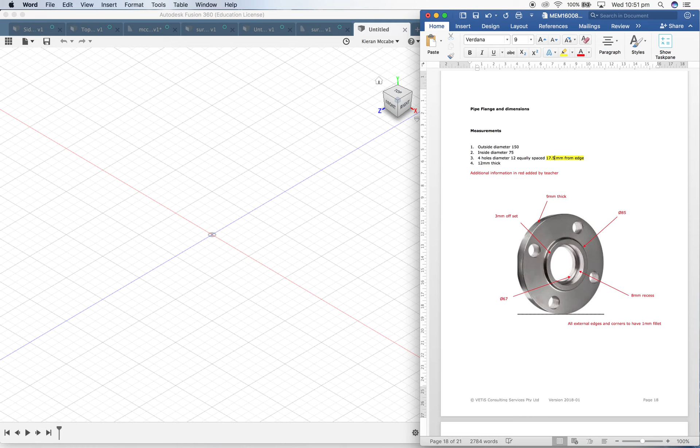And as we discussed previously, some of the information has been missed and anything in red is what we've added. Now one thing I need to add here, for point number 3, the 4 holes are diameter 12 equally spaced at 20 millimeters. That size should actually be 17.5. So remember that as we go along, please.

So to start, I'm going to show you a way to draw it. With this project, or this shape, there's a number of ways of doing it. So the way I'm going to show you is just one way of many, and it's completely up to yourself. So as always, I'm going to click the sketch, and I'm going to take the plane and start from here.

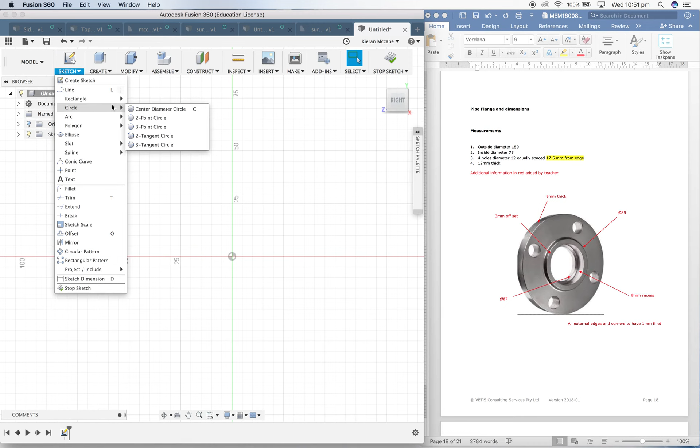Now this time we're going to start using the circle tool. There are a number to use. Best one to go with is just the first one, the centre diameter circle, and I'm going to go just in the centre here. And the first size is diameter. We're looking at 150, and just enter that.

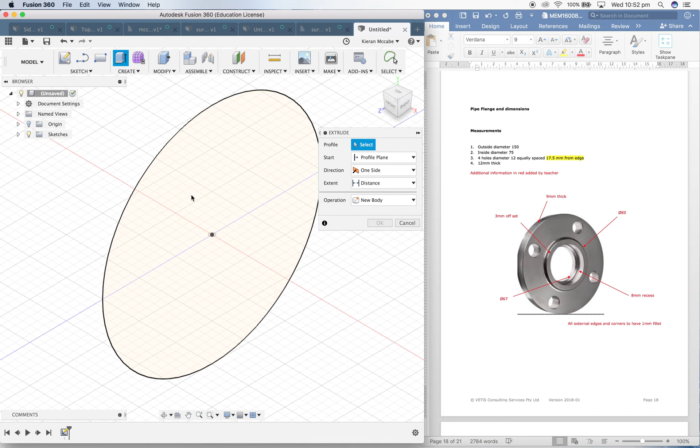Now, next thing I'm going to do is put the depth on it. As we see here, the overall thickness is 12 millimeters. So I'm going to extrude it 12 millimeters, like so. Now that I've got the main shape, I'm now going to start from the smaller sizes, the small diameters, and work my way out.

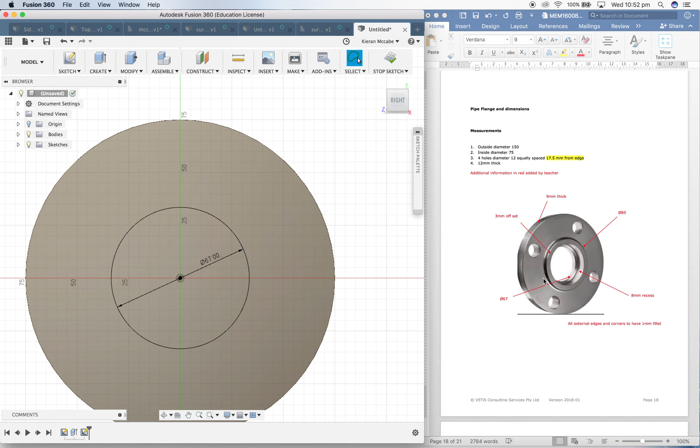Again, I'm just going to continue selecting a face as we go on. So first one, circle. Now the smallest size I've got here is a diameter of 67, and that is for that internal face. In here, and again it's got to be accurate. I'm going to stop the sketch, and with this one again, with the extrude tool, we're going to go the whole way through, like so.

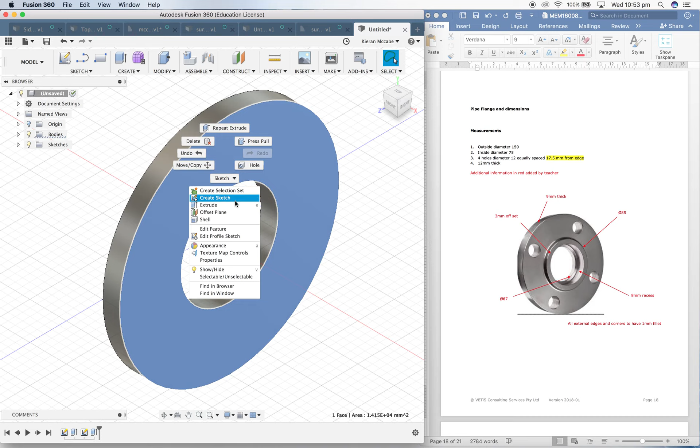So now that we've got that, we're now going to work on this lip here. And again, that diameter will be the 75, which is the internal size. So again, on here, taking the sketch, take the circle, just move that up, and here I'm going to go 75. Make sure it's definitely set, finish the drawing, and again we're going to extrude it.

Now this time, we need to look here, the recess is 8 millimeters. So again we're going in the way to cut through the material, and we want to remove 8 millimeters, like we did here. Now what we're going to look at doing is removing all of this material, and there's an easy way to do that, and I'll show you how.

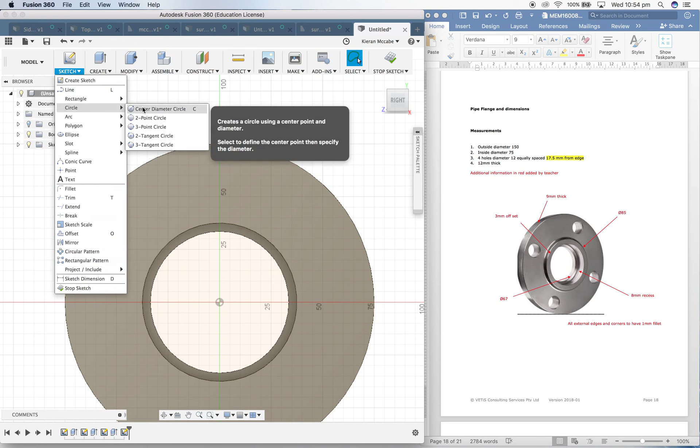So again, same face, we can select and create the sketch, and the size we're after now is 85. Now for some of you it might be worthwhile crossing these off your booklet as you go, otherwise you may get a little bit confused. So again, take the circle, go through the centre, and we're going to go for a diameter of 85.

And stop the sketch. Now this time we're focusing on the outer circle, and as we can see here, the main body is 9, and it's an offset of 3. So what we're going to do is go in reverse, and we're going to take 3 millimeters away from this section, like so, and OK it there.

Now we're going to look at putting in the holes, and this is where this part comes in. So again, going to select, create a sketch on the face, and all we're going to do to start is basic circle tool, just somewhere here. You can actually put it anywhere in the circle you want. I'm just going to start at the top here, line out with my circle, and the diameter of it was 12, like we said in point number 3, and we have that there.

Now we need to get the distance. It's saying 17.5 from the edge. Now to use our dimension tool, it will not give us a measurement from the edge of the circle to the centre. So what we're going to do is select the centre of our flange to the centre of our circle and bring it out here. We can see that the size is 60.

Now a bit of simple maths: instead of typing in 17.5, we're going to remove the 17.5 from the radius of the bigger circle, which was 75. So if we take that away, that will give us 57.5, like so.

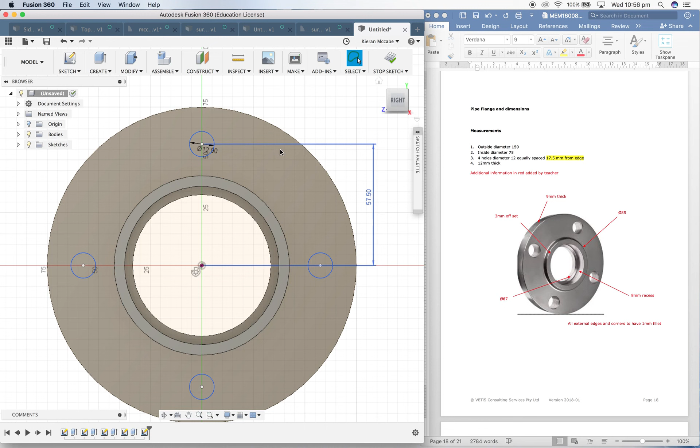Now in here, quantity, you can have as many as you want, but we only need 4, and it'll equally space them around the circle for us. I'm going to press OK, like so. When they're all in place, we're going to stop the sketch, and like again, we're going to use the extrude tool. We're going to individually select all 4, and we're going to go back the way 9 millimeters to remove the material, like so.

Now to finish the drawing, all we have to do now is round the edges, as it says down the bottom here. Now to do so, we're going to go into modify, and we're going to look at the fillet tool. And all we're going to do is focus on the outside edges. So working my way around on the top face. Again, don't need to hold anything, just click and it will select all of them. And this piece in here. Don't need to do anything in here or at the bottom, just these.

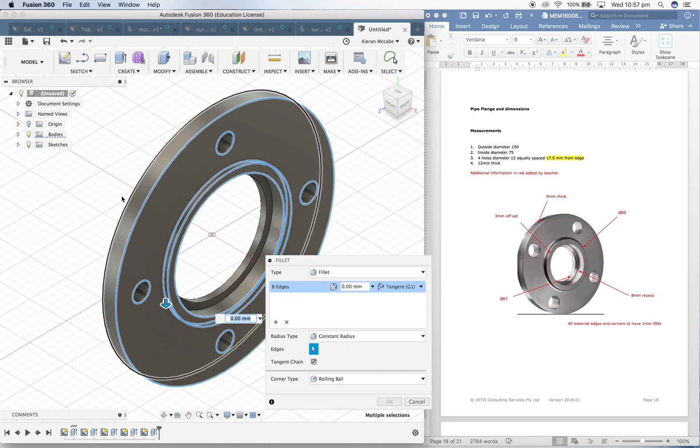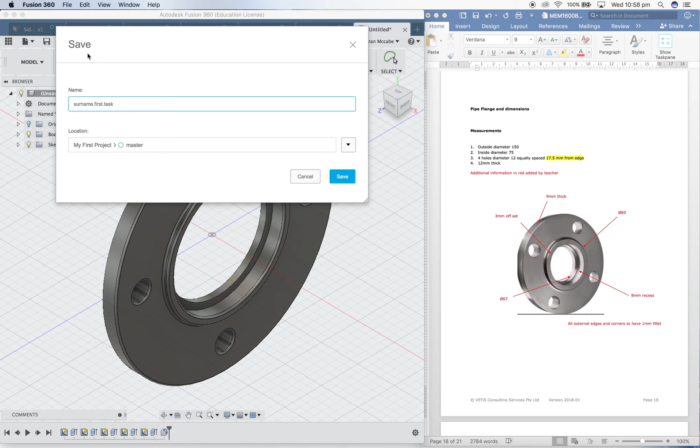And then in here, we're just going to set the radius to 1. All we want is a slight round on it and nothing else. Like so. So, when we get to this stage, that is the drawing complete for now. And all we have to do is make sure we save it. Again, it's going to be surname, first name, that'll be class 4, and it'll be the flange. And we can save that like so.

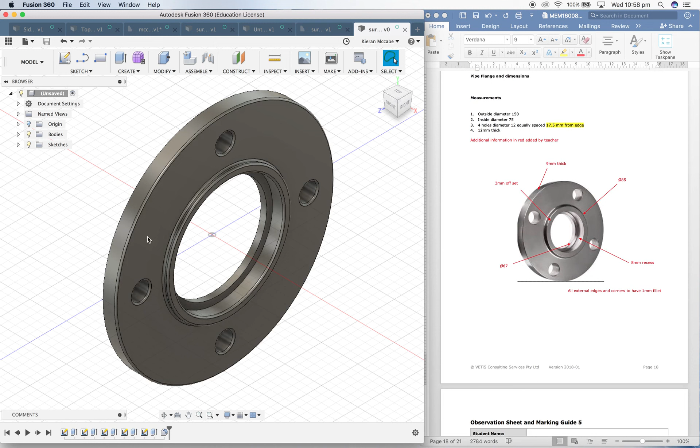Now, another part of the stipulation for this drawing, it was actually asking us to render the drawing. So what we're going to do here is we are going to add the material to it. So once this is saved, we're going to go up to where it says model, down into the drop menu, and press render. And again, straight away you can see that everything's changed. Now we can spend a load of time in here, but all we want to do is pick a physical material. Now the great thing is with Fusion, there are a number of different ones, but all I want you to do is pick a metal.

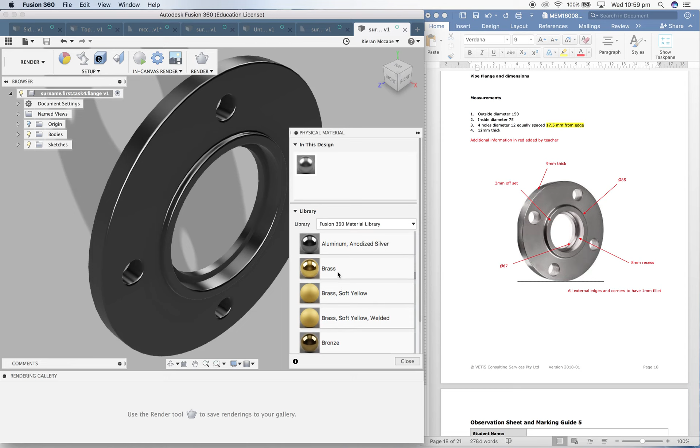I don't mind if you pick something a bit colourful or not your traditional metallic colour, but as long as it is a metal. But again, as you can see here as I'm scrolling through, there are loads. I'm going to go with aluminium red. I'm going to select it, I'm going to click and drag it over onto my project, like so, and we can see that it's changed here. I'm just going to collapse that physical material in.

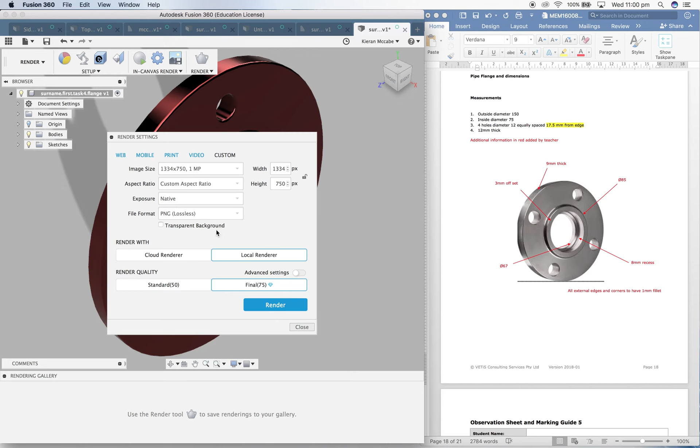Now at the moment that's not completely rendered. To do so, I'm going to select the render tool. Now when you go into this the first time, it will ask you to use the cloud render. That is all online. We just want to do a local render at the moment. And just to speed this up, we can go for something a little bit more basic. The higher you go, the longer it's going to take. So I'm going to go for mobile and tablet, and I'm going to go for 1 megapixel, like so, just to show you. Now you can play about with these if you wish, and I'm going to press render.

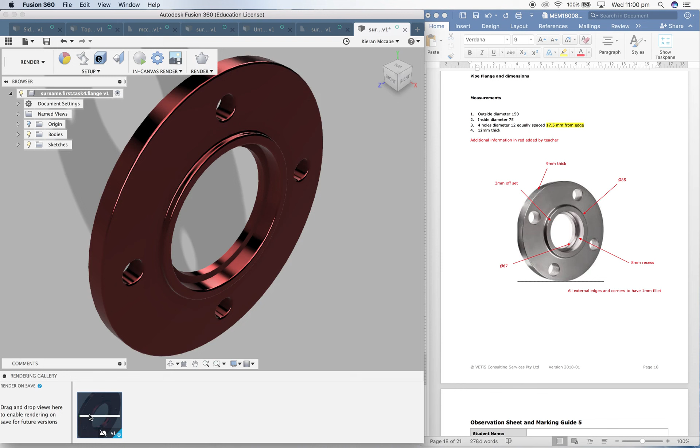Now as you can see, it's starting going, and like everything else, depending on the processor or the power of your laptop, this process can change, and we can see that it's going here. And what we'll have to wait for is the bar to fill all the way up. Previously I've already done this, and when this happens we can actually save it. We can export it and actually print a rendered part. Now this here will need to be printed. This just needs to be printed in A4, and that'll be absolutely fine. But again, just ensure you save your work, because we will need to use this drawing in the next video to complete another working drawing.